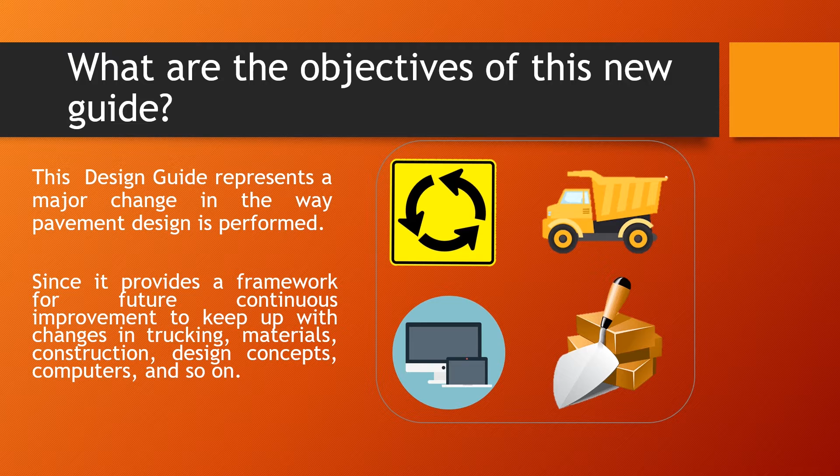What are the objectives of this new guide? This design guide represents a major change in the way pavement design is currently performed, since it provides a framework for future continuous improvement to keep up with changes in trucking, materials, construction, design concepts, computers, and so on.

For example, in the climatic effects, they only took into consideration one type of geographical location, as well as only one type of subgrade, which makes these values non-representative.

There's also the truck characterization issue, in which by the time the previous guide was made, the number of trucks has increased tenfold by now. So these values are also not representative. There's also a design life deficiency, since roads are now designed to last longer instead of 20 years. Now they are required to last 30 or 40 years. So this also creates a deficiency in the design.

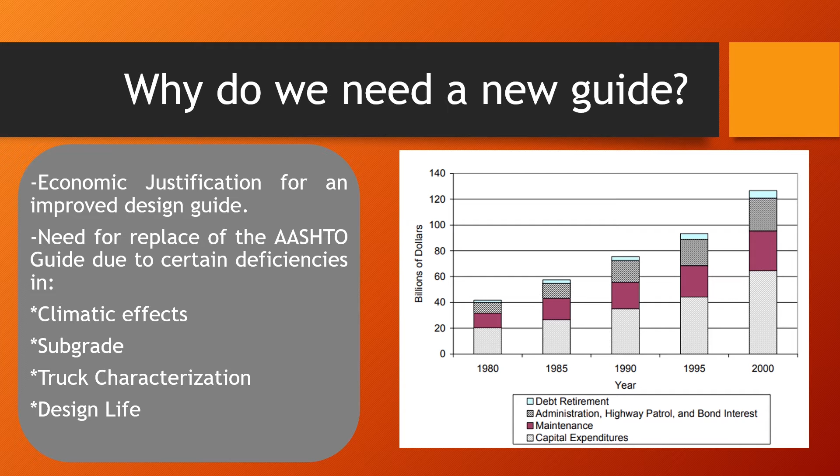What are the benefits of this guide compared to the previous one? This design provides the tools for evaluating the effect of variation in materials on pavement performance. Since the mechanistic procedures are able to better account for climate, aging, present-day materials, and present-day vehicle loadings, variation in performance in relation to design life should be reduced. This capability will then reduce life cycle costs significantly over an entire highway network.

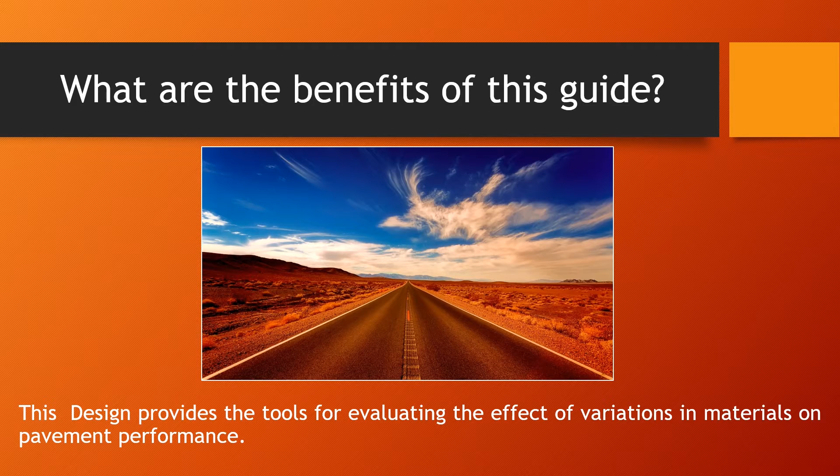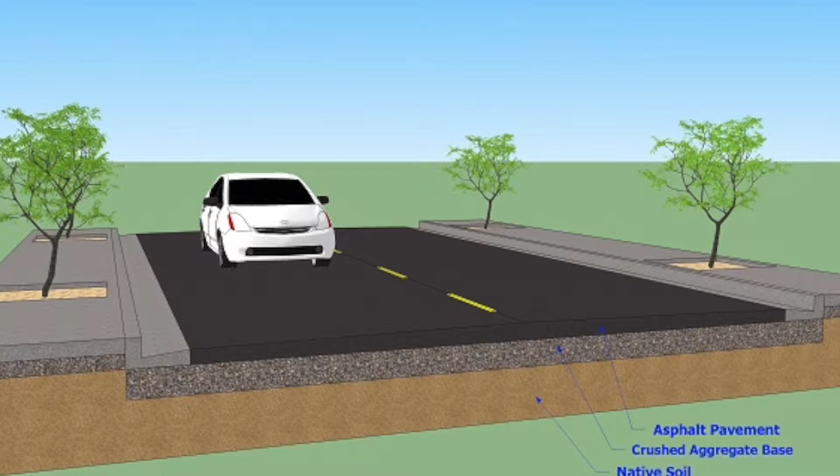The design approach provided by the guide has three major stages. Stage 1 consists of the development of input values for the analysis. One key step to this process is foundation analysis, which for new pavements includes stiffness determination and evaluation of volume change, frost heave, thaw weakening, drainage concerns, etc. For rehabilitation projects, it includes the investigation of distress types and their causes. Also, during this first stage, pavement materials characterization and traffic input data are developed.

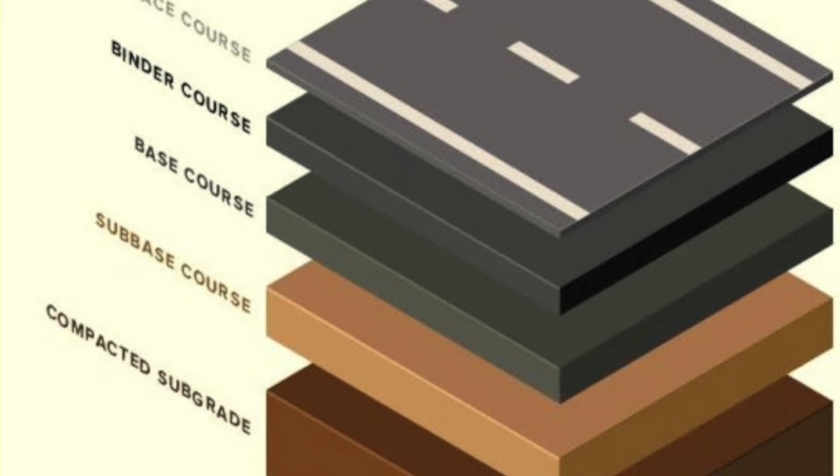Stage 2 of the design process is the structural or performance analysis. This analysis approach is an iterative one that begins with the selection of an initial trial design. The trial design requires initial estimates of layer thickness, geometric features, initial smoothness, etc. It is analyzed incrementally over time using the pavement response and distress models. If the trial design does not meet the performance criteria, modifications are made and the analysis reruns until a satisfactory result is obtained.

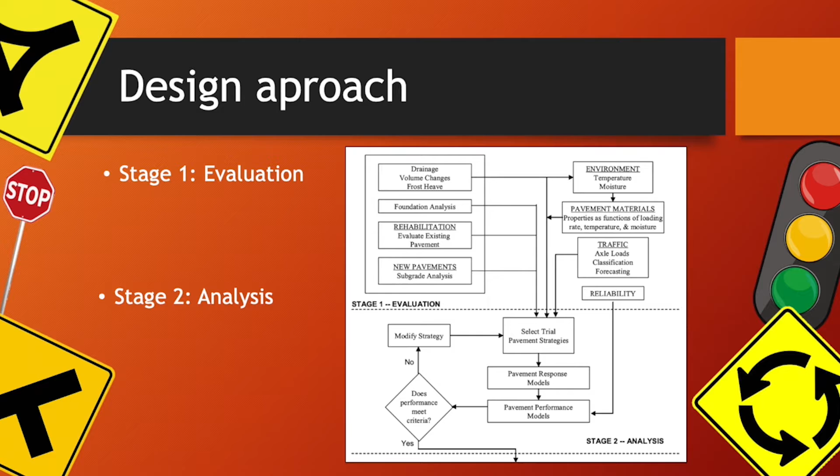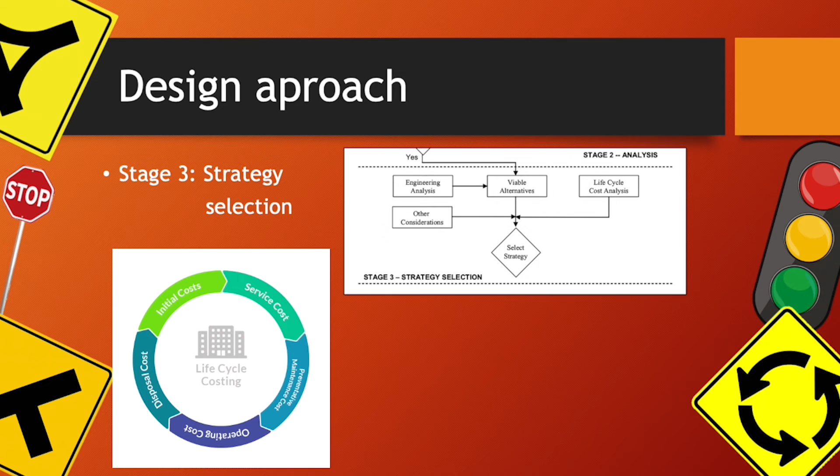Finally, stage 3 of the process includes activities required to evaluate the structurally viable alternatives. These activities include an engineering analysis and life cycle cost analysis of the alternatives. In summary, the design process includes consideration of the parameters shown on the screen.

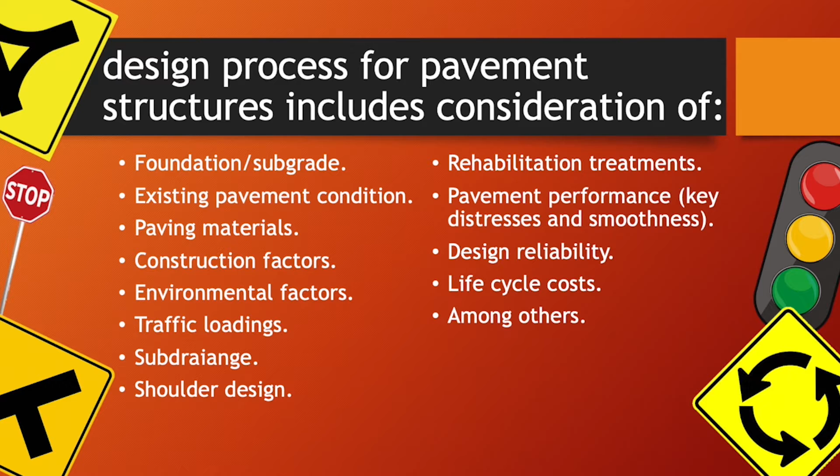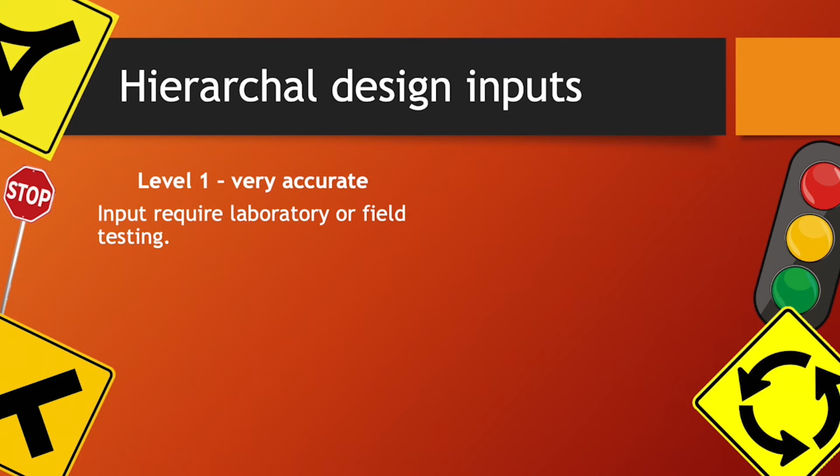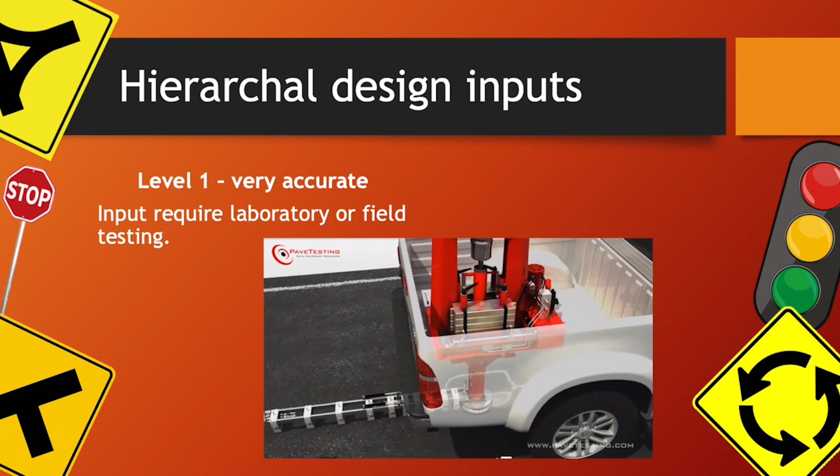There are different ways for obtaining the design inputs for a design project based on the criticality of the project and the available resources. In general, three levels of inputs are provided. Level 1 provides the highest level of accuracy, and it requires laboratory or field testing, such as the dynamic modulus testing on hot-mix asphalt concrete, site-specific axle load spectra, etc.

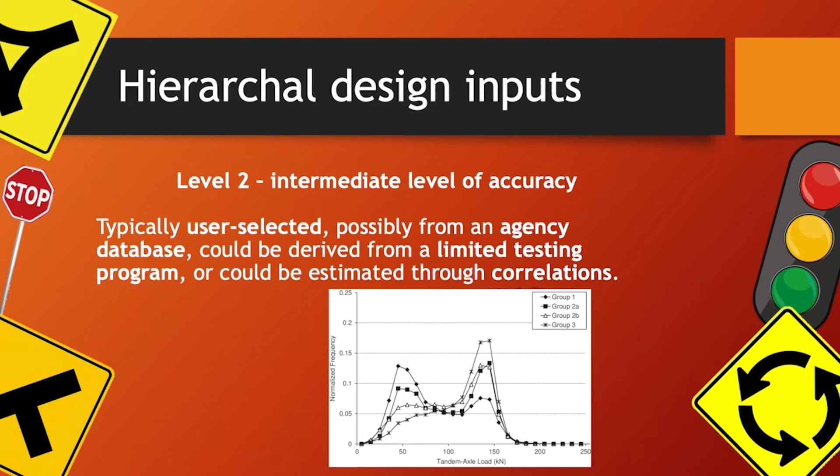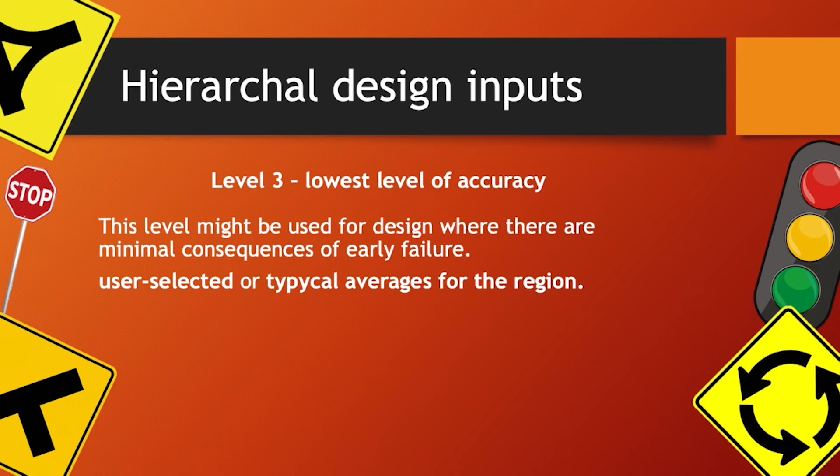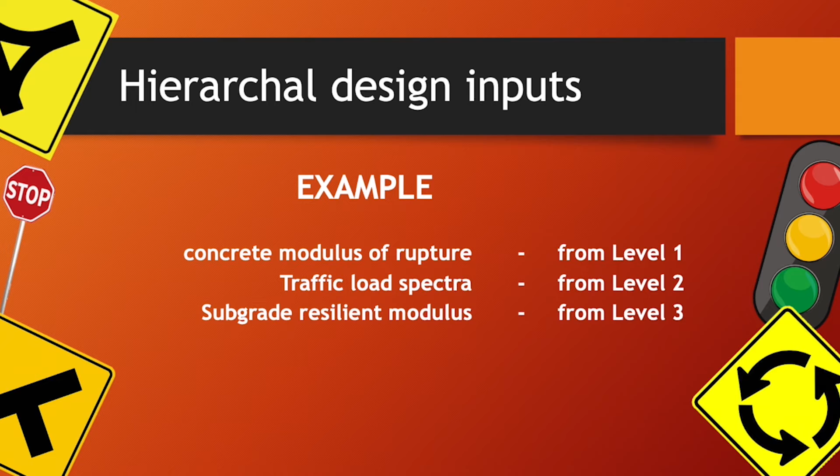Level 2 inputs typically would be user-selected, possibly from an agency database, or they could be estimated through correlations. Level 3 inputs provide the lowest level of accuracy, and they typically include user-selected values or typical averages for the region. For a given design project, inputs may be obtained from a mix of levels, for example, concrete modulus of rupture from level 1, traffic load spectra from level 2, and subgrade resilient modulus from level 3.

Pavement Serviceability Index is represented by the serviceability history of the given pavement. The PSI is obtained from measurement of roughness and distresses, such as cracking, patching, and rut depth for flexible pavement, at a given time during the service life of the pavement.

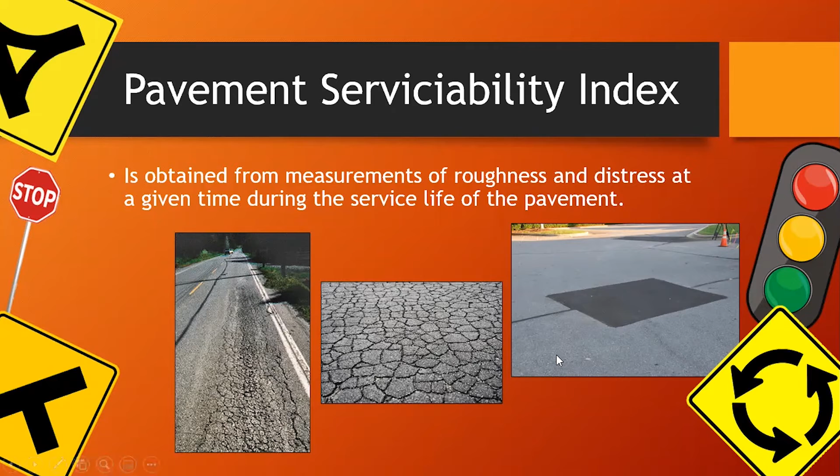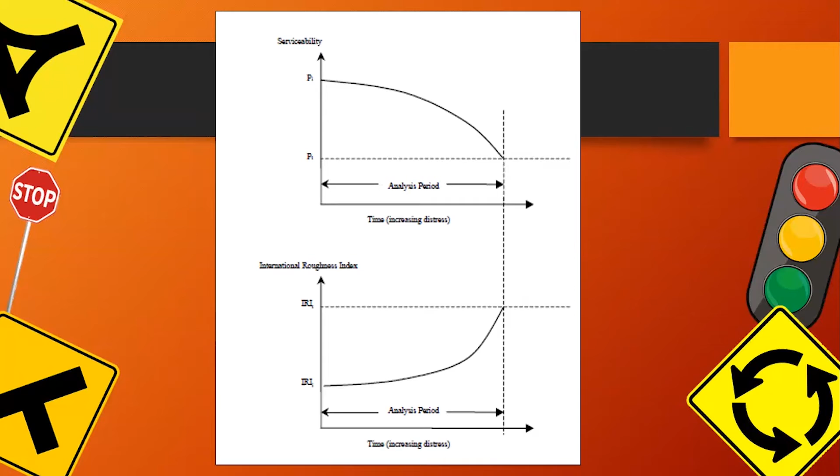The smoothness model form is based on an additive combination of initial smoothness, change in smoothness due to the increase in individual distress, and change in smoothness due to site condition and maintenance activities.

Traffic characterization, Level 1: the recommended approach for high-volume roads requires the gathering and analysis of site-specific traffic data, including vehicle count by class, by direction, and by lane.

Level 2 is similar to Level 1, requiring site-specific volume and classification data. However, state or regional axle load distribution expected for each vehicle class may be used to estimate loading over the design analysis period. Level 3 will provide default load spectrum data for a specific functional class of highway. The designer applies these default values to available or estimated vehicle volume data.

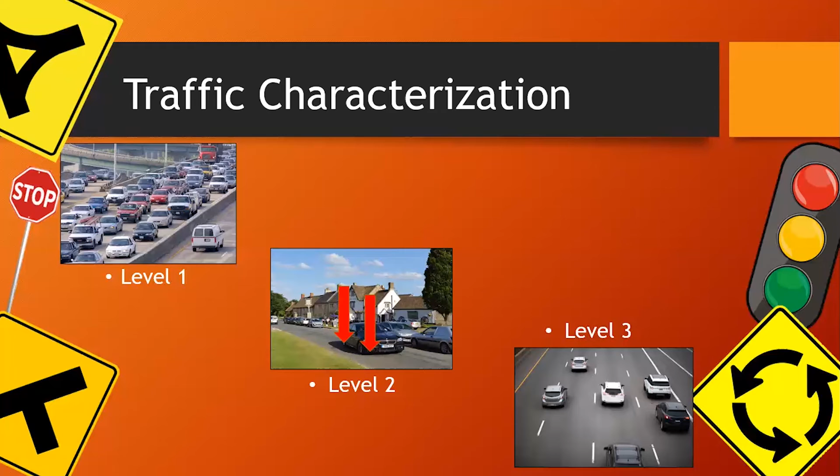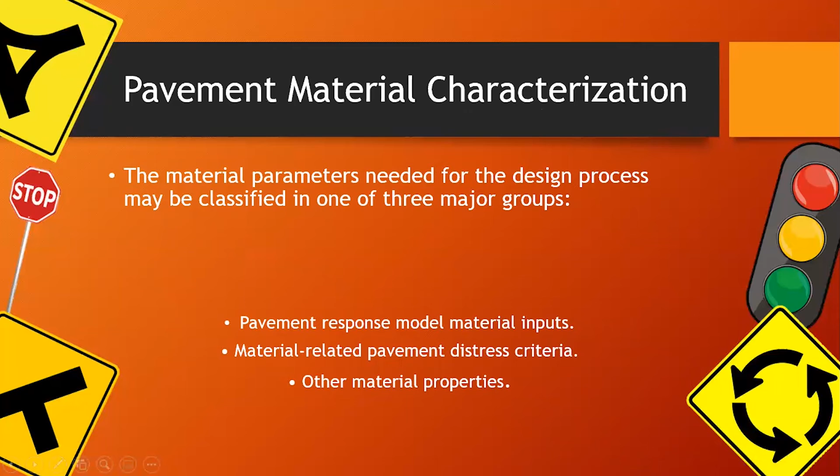Structural modeling of the pavement. The structural response models are used to compute critical stresses, strains, and displacements in flexible and rigid pavement systems due to both traffic loads and climate factors, such as temperature and moisture.

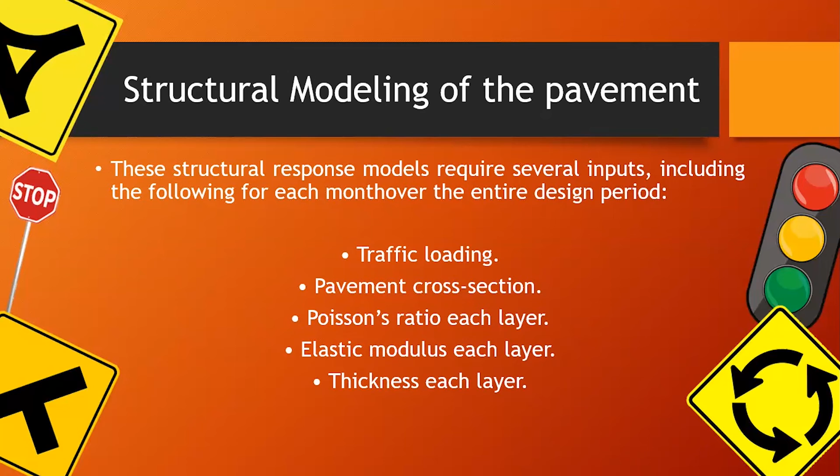Design of rehabilitation projects. The guide presents procedures for utilizing the results for the evaluation of existing flexible, rigid, and composite pavements, and the design of HMA and PCC rehabilitation for these pavements.

The structural design of this rehabilitation is very similar to that of the empirical design of new or reconstructed pavement, with the major exception that the existing pavement condition is fully considered.

A trial rehabilitation design must first be proposed and then is evaluated using the design guide software, which predicts the key distress types and smoothness.

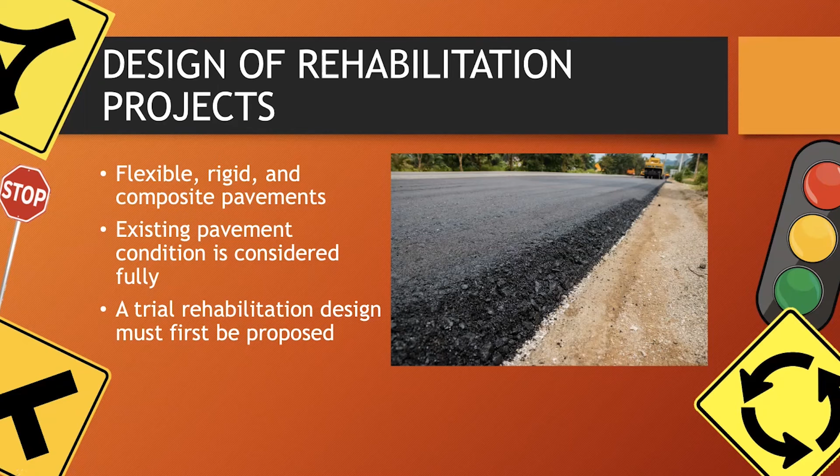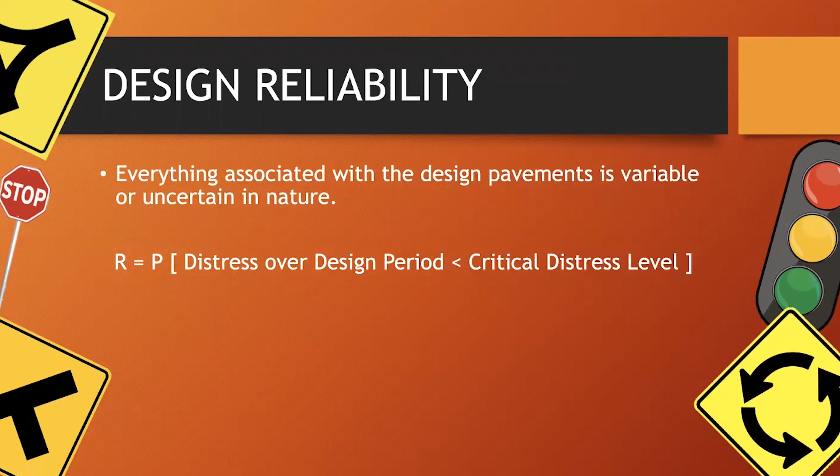Design reliability: practically everything associated with the design of new and rehabilitated pavements is variable in nature. Reliability has been incorporated in the guide in a consistent and uniform fashion for all pavement types, and is defined as the probability that each of the key distress types and smoothness will be less than the selected critical level over the design period. Some of the variations from the previous version of the AASHTO design guide...

...are that this version considers each key predicted distress and the IRI directly in the definition. In the approach taken in the guide, several design features other than thickness are considered to improve the reliability estimate of the design.

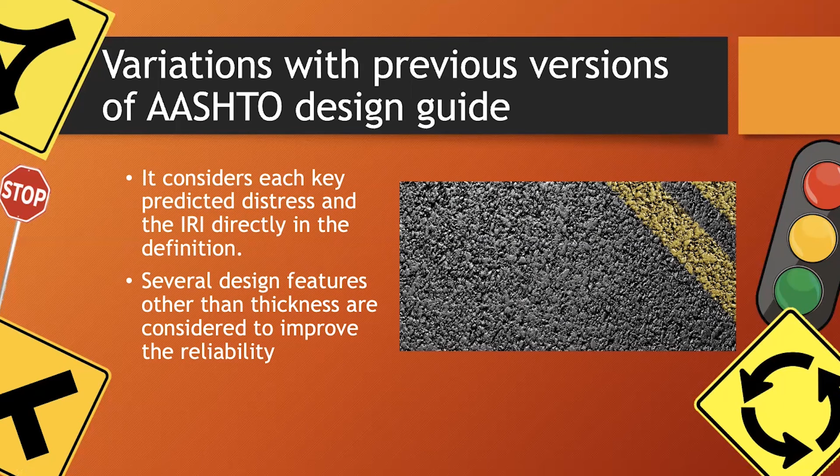The designer begins the design process by configuring a trial design, then makes the prediction based on the mean values of the key distress types and smoothness over the design life of the pavement. The standard deviation of the distribution of the distress is determined as a function of the predicted cracking.

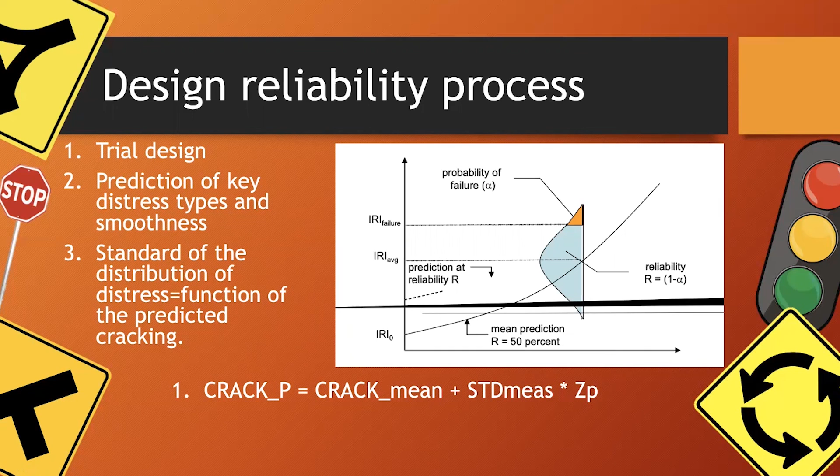Using the following relationship, it's possible to estimate the cracking at the desired reliability. It's important to mention that if a pavement designer wants 90% reliability for cracking, then the predicted 90% curve must not exceed some pre-selected critical value of cracking.

To select an appropriate level of reliability, the designer must consider that the levels for each distress type and for the IRI need not be equal. There's an inherent connection between the levels selected for each distress type and IRI and the level of design reliability. More importantly, the higher the consequence of failure, the higher the design reliability.

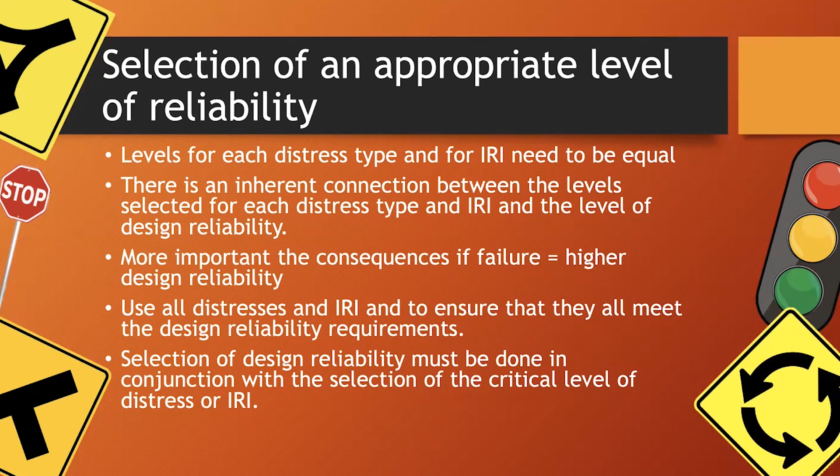Use all distresses and IRI to ensure that they'll meet the design reliability requirements.